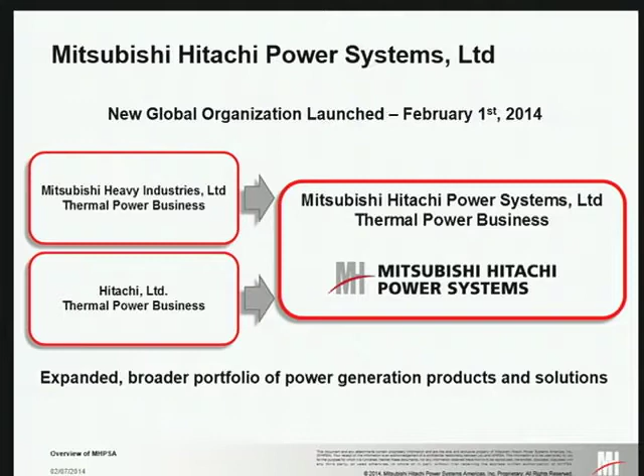As Todd mentioned, we're now Mitsubishi Hitachi Power Systems, so I feel I owe everyone an explanation. If you haven't heard already, as of February 1st, MHI and Hitachi Limited merged their thermal power businesses globally. The new company name is Mitsubishi Hitachi Power Systems, and we're part of the Americas arm of that business.

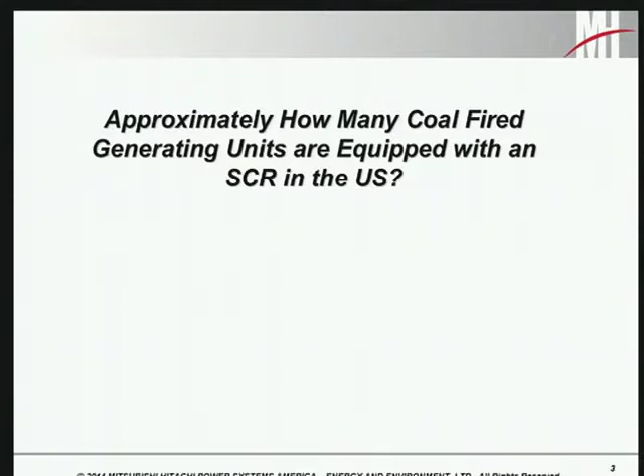So just real quick, anybody have any idea how many coal-fired units are in the U.S. that have SCRs? Any idea? It's actually much lower than that on a percentage basis. There's probably somewhere over 1,000 units out there. Only 300 have SCRs currently.

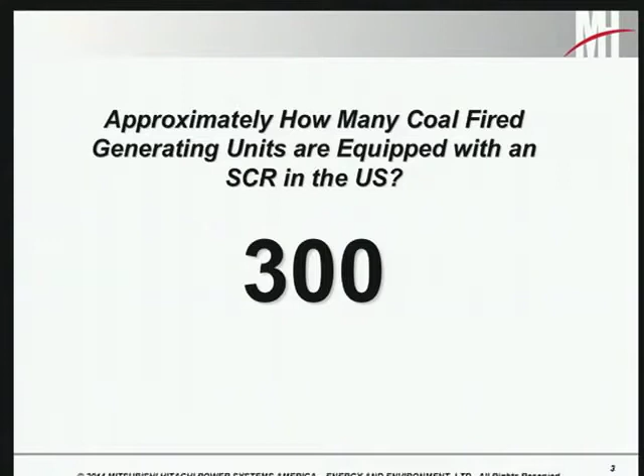But whenever we look at those 300 units, the majority of those also have FGDs in place already. So whenever you look at the oxidation of mercury that takes place across the SCR, most of those units are also able to capture that oxidized mercury in the downstream scrubber. So a lot of units out there are already getting great mercury co-benefits, we call it, from the SCR and FGD. So I'm just going to focus a little bit on how we can optimize that process that's already naturally occurring in our plants.

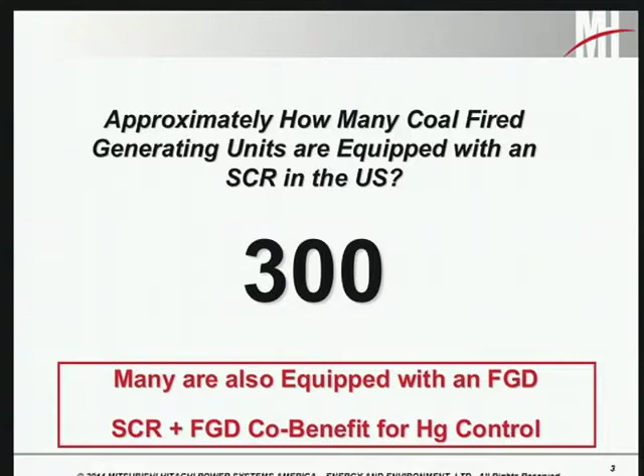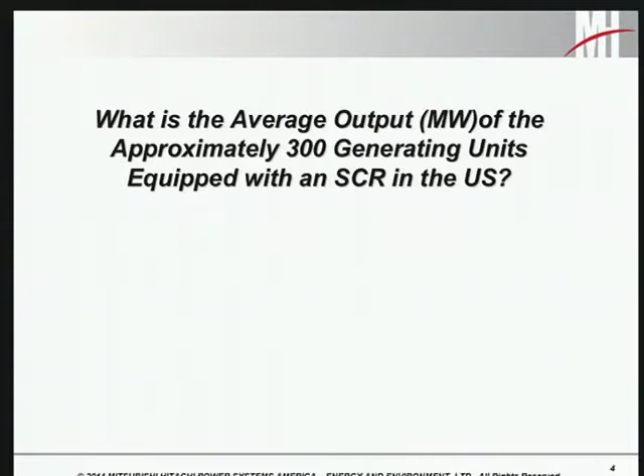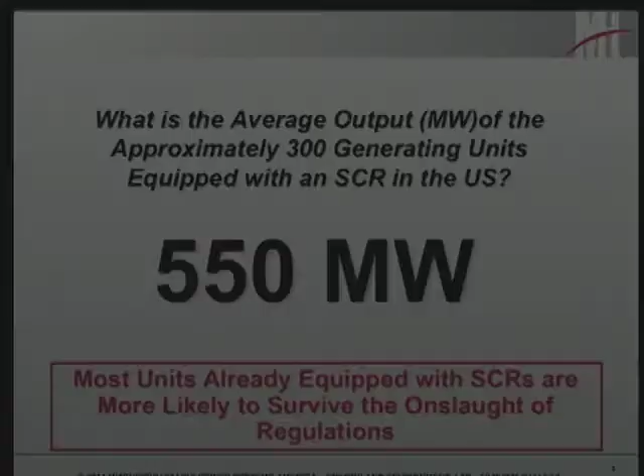So another quick question: of those 300 units equipped with SCRs, what do you think the average size of those units are? Well, it's about 550 megawatts, the average size of those units. So these are the larger units. They're already equipped with SCRs. Most of them have FGDs. They're probably the future of our coal-fired generation base in the U.S. So it makes a lot of sense to optimize and try to keep costs low on these units and comply with the rules.

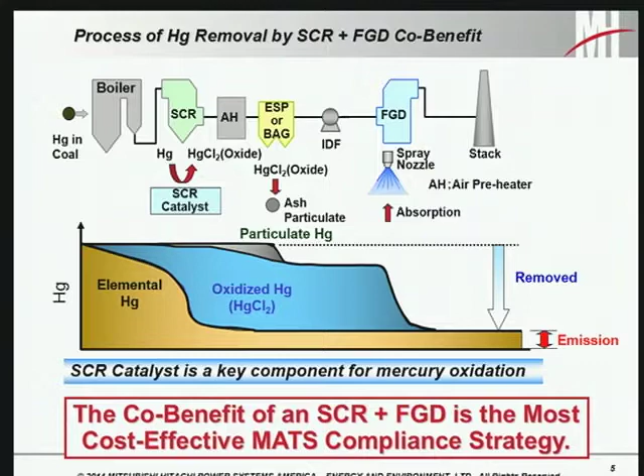Oops, I'm bouncing ahead a little bit. All right, so if we just look at the mercury removal process as we go across a typical coal-fired power plant, you can see the mercury comes into the plant in the coal in the elemental form. You get some mercury oxidation that takes place throughout the combustion process, but the majority of the oxidation actually takes place as the flue gas passes across the catalyst. Oxidized mercury is much easier, much cheaper to take out, especially if your unit also has an FGD. In theory, you can get nearly 100% of the oxidized mercury removed in an FGD as long as you've got good chemistry and you're avoiding re-emission basically. So what are you left with at the stack? Well, you're left with basically anything you weren't able to oxidize. And that's why oxidation in the SCR is such an important factor.

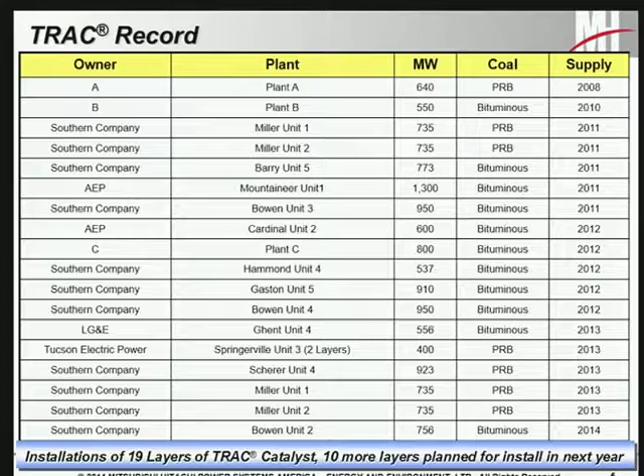So what are some of the main parameters that impact mercury oxidation in the SCR? There are 5 main ones that I'm going to talk about.

That being ammonia to NOx ratio. That's key. As you have more ammonia, typically it's harder to oxidize mercury. They go after the same active sites on the catalyst, and the catalyst was originally designed for NOx. That's the dominating reaction that wants to occur. The catalyst, as it ages and deactivates, it's no different than NOx. The mercury oxidation rate also deactivates and ages as the catalyst has been exposed to flue gas over time.

Halogen concentration is a big one. You've got to have halogens. It's the equivalent of your ammonia in the NOx reduction reaction. You use the halogens that are present in the fuel or added in the combustion process or downstream of that somewhere, but those are what are used with the catalyst to combine with the mercury to oxidize it.

Temperature is another big one in the SCR. In general, the higher the temperature, the less mercury oxidation you're going to be able to get. Lower temperatures are definitely much more prone to oxidizing mercury.

Another big thing we're starting to learn more about—we're constantly learning about what impacts mercury oxidation in the SCR—is what is your elemental to total mercury ratio in the SCR? This has a huge impact. That last little bit of elemental mercury is much harder to get than whenever you have a very high ratio of elemental mercury.

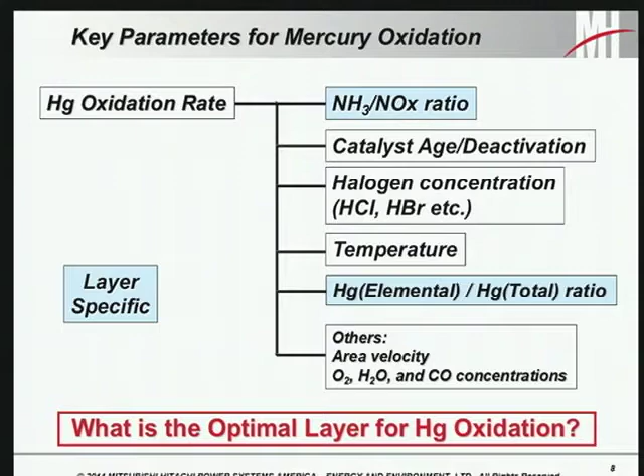So the two that are shaded in blue there are the layer-specific parameters. As you go through your SCR, your ammonia to NOx ratio is going to change with every layer of catalyst, and you're going to oxidize some mercury with every layer of catalyst. So now your ratio of elemental to total mercury is going to be different for every layer of catalyst. Those are the two that I'm going to focus mostly on when we look at trying to build this strategy and what is the best location for getting mercury oxidation in your SCR.

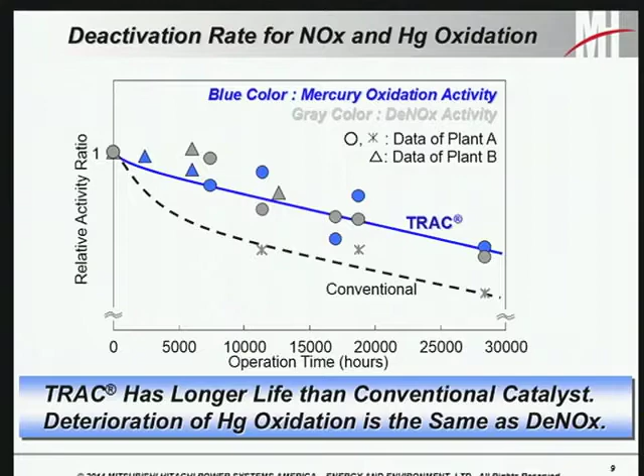So just real quick, I'll hit on the deactivation rate. In general, the deactivation rate of the mercury activity of catalyst is very much in line with the deactivation rate of the NOx reduction activity. So whenever you look at those two things, you can probably still work on a similar catalyst management plan as what you were using in the past.

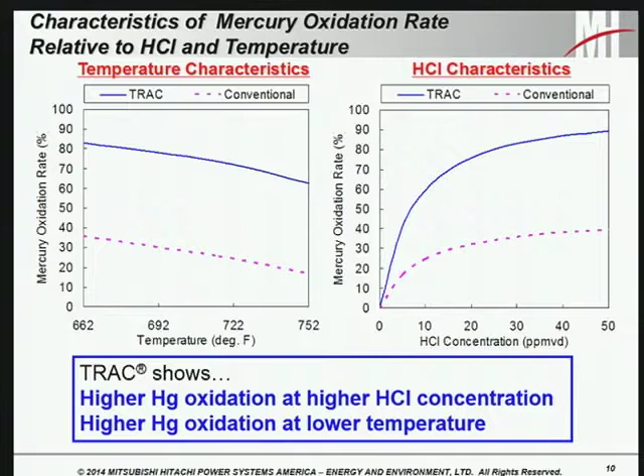Before I get into the layer specifics, I want to discuss a little bit of the testing background and how some of these layer specifics were determined. We do mercury oxidation testing in a lab, small scale—similar to a bench scale test that is very commonly used on catalyst. But we're using a lab scale because we don't want to inject mercury in the bench. It causes all kinds of different problems that, quite honestly, I don't think anyone is doing yet. I know people are looking at it, but no one is doing it yet. So everyone that's testing in the lab with mercury right now is doing it on this small scale lab testing.

So what we do is we're testing in the lab. We're implementing a set of correction procedures and correction curves to try and predict what the performance is in the plant based on that. And over the years and over our testing and experience comparing field results to lab results, we've been able to dial in on this fairly well.

But there's always still things you're learning. There's things such as ash that are present in the field that you really can't account for, and what impact does that have? It's very difficult to determine. So we're learning and getting better every time we do a test, but we're still not 100% accurate in being able to predict the performance in the field with a lab test.

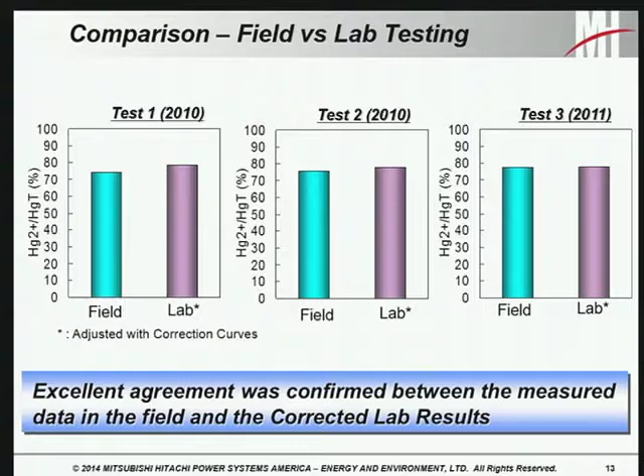We did test 1 and test 2 back in 2010, very good correlation, and then test 3, we came back to the same plant, same location, did the test again in 2011 and got very good correlation again, as you can see. So I think we're very close to getting accurate results based on field and lab measurements, but I just can't say with 100% certainty that every plant is operating the same. There's always differences in every plant.

So if we look at layer-specific impacts, we look at two different scenarios, eastern bituminous case and PRB case. That's what they're calling them. Really, anytime from here on in the rest of the presentation, whenever I say eastern bituminous, you can replace that with a higher or moderately halogenated fuel, or whenever I say PRB, I'm talking a lower halogen fuel.

So for this, as I mentioned before, the ammonia has a big impact, so we looked at 90% NOx reduction, so you've got a large amount of ammonia. In an eastern bituminous plant, general rule of thumb, about 20% of mercury is already oxidized entering the SCR. On the PRB, or lower halogen fuel side, about 10%. And then HCl is the big one. We used what we feel is a typical halogen level for eastern bituminous or a medium to higher halogen fuel, and then the lower halogen fuel, PRB style, 5 ppm.

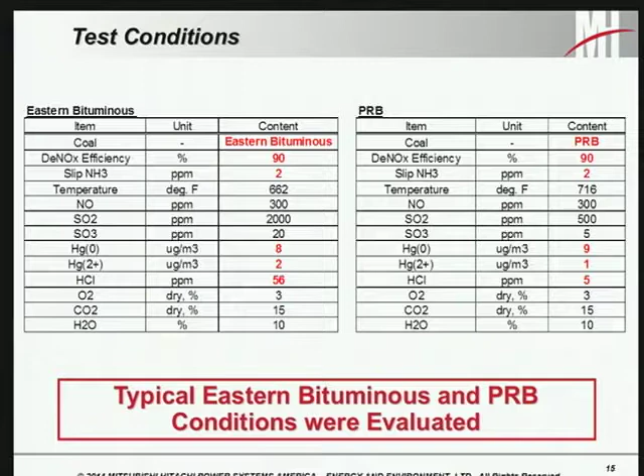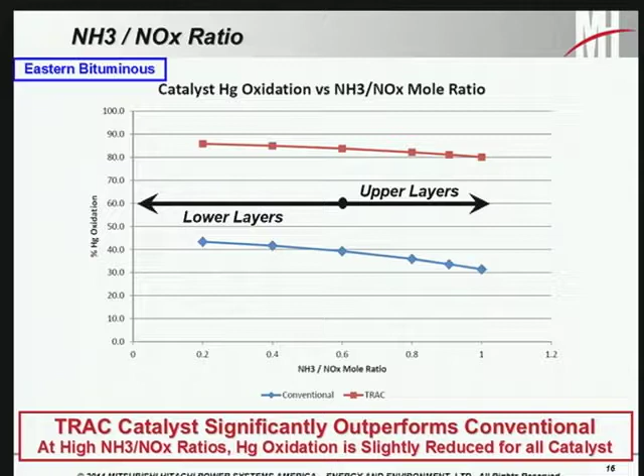But what happens whenever we introduce on top of this and we intermingle the concept of the ratio of elemental to total mercury in the SCR? This next slide takes a look at that. I think I've got maybe in general where your upper layers and lower layers in your SCR relative on this graph, and what the impact is.

But you get more benefit in the lower layers relative to a conventional layer. So where's the balancing act?

So what we did was we looked at 6 different cases. We looked at a base case where you use 4 layers, all conventional catalyst. Then we looked at 4 more cases where you put a layer of advanced catalyst in either the first, second, third, or fourth layer. And then a sixth scenario where you used advanced catalyst in all layers.

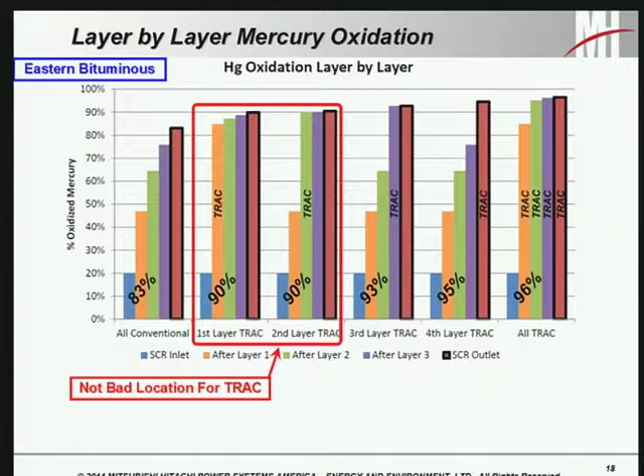So does it even make sense on a higher halogen fuel to go to advanced catalyst in all layers? Maybe not, probably not really. So if you're running your catalyst management plan and you're due to replace your first or second layer, it's not a bad location for TRAC, it's just there are other options out there that are better. So the 3rd or 4th layer is a more ideal location for the TRAC.

This is all based on lab testing. There's errors in the measurements and everything, so who's to say there's a big difference between 93 and 95% in this? It's tough to say, right? So I think 3rd or 4th layer are both really good locations to put in advanced catalyst.

As I said before, if you look at the bottom layer, there's really not much benefit to putting it in all 4 layers. So what impact does this have on actual mercury emissions at the stack? If you look at 83% mercury oxidation compared to 95% in your SCR, and you're assuming a good capture efficiency in the FGD, you're actually looking at a 70% reduction in stack mercury emissions at this plant. So it doesn't seem like a lot when you're looking at percentages, but when you look at what actually makes it to the stack, it's a huge impact.

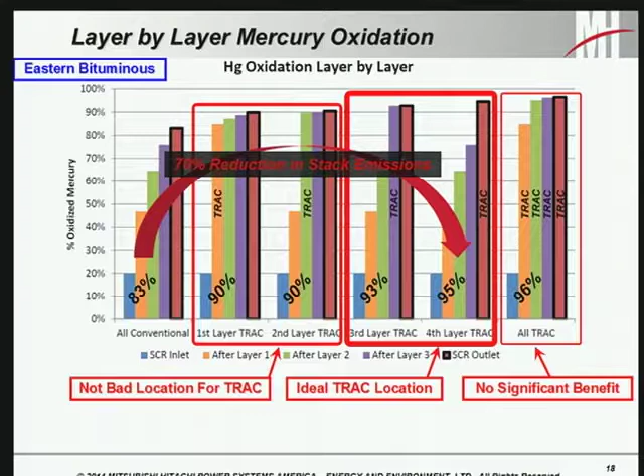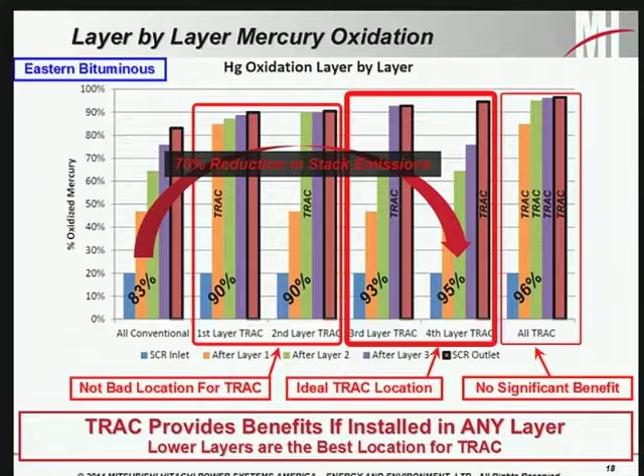So what can we take away from this on the higher halogen fuel side? Really, an advanced catalyst installed anywhere is going to give you some benefit, but if you have your choice, it's probably better to install it in the lower layers.

So same thing for the lower halogen fuel. I'll run through this a little quicker. It's the same analysis, only the halogen concentration is much lower. Again, a very similar relationship on the ammonia to NOx molar ratio. Upper layers, again, a little bit less compared to lower layers, until we factor in the impact of the mercury speciation.

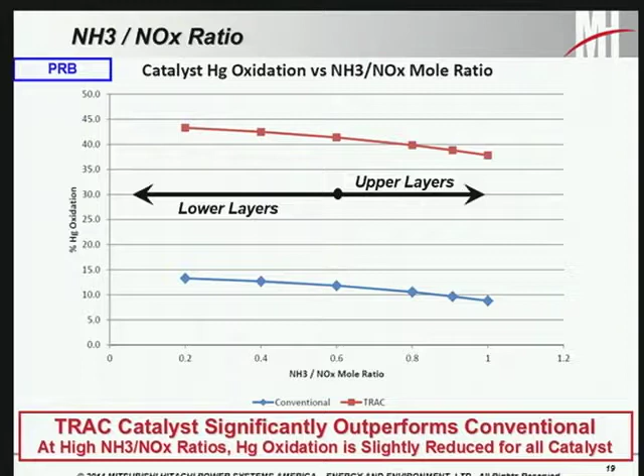There we go. So again, now the curve looks completely different after we implement the concept of different molar ratios of elemental to total mercury. Again, we look at our upper layers compared to our lower layers and the differences between the advanced catalyst. We're getting about 3 to 4 times more mercury oxidation activity in the upper layers and maybe 5 to 8 times more in the lower layers.

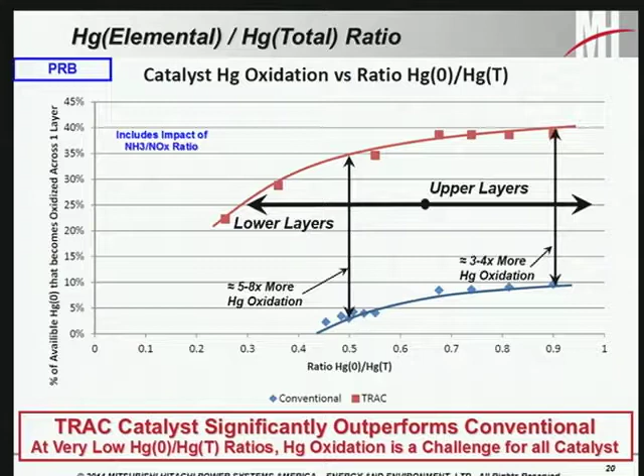So again, what does that mean? Well, we're looking at roughly 38% mercury oxidation with 4 layers of conventional catalyst, boosting it up to 51% when TRAC is in the first layer. When TRAC is in the second layer, it's boosted up to 53%, 56% in the third layer, and 59% in the fourth layer.

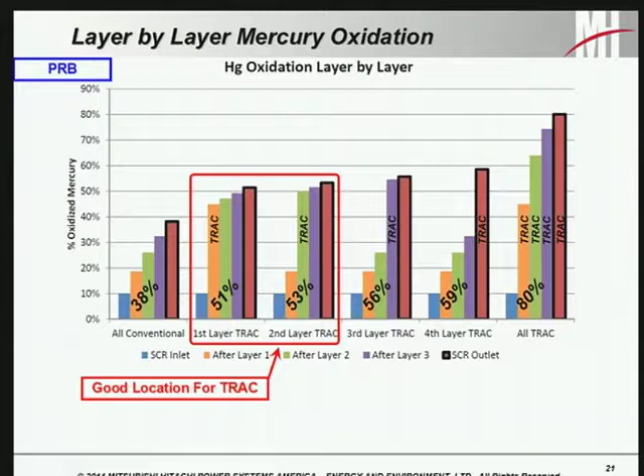But if you look here, you can go, if you get to all TRAC eventually, right? No one's probably going to go out and say, I just want to take all my current catalyst out and put in TRAC. But over the years, as you're replacing catalyst, maybe every couple years, eventually you could get to a point where you might have all TRAC. And we look at roughly 80% mercury oxidation at that point. So what can we say? We can say actually going from 38 to 51%, that's a pretty good location for TRAC, that's not too bad at all. In the lower layers, it's even a better location.

But what's the ideal scenario here? The ideal scenario is installing TRAC eventually to a point where you get as much of it in the box as you can, because you're going to get a noticeable benefit every time you put another layer in.

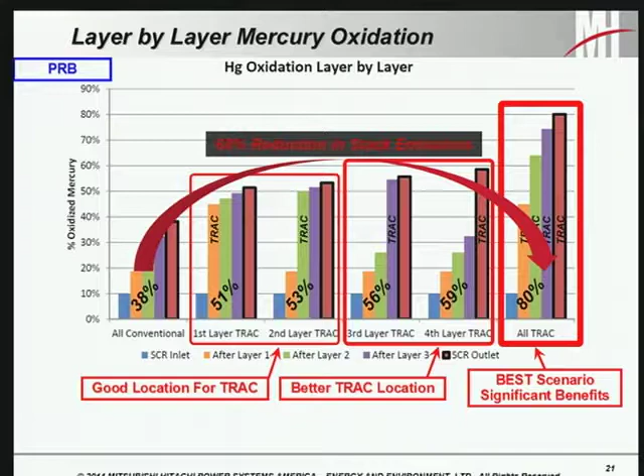So if we look at this again, what it means at the stack, if we went from 38% mercury oxidation in our SCR to 80% mercury oxidation in our SCR, we're looking at roughly a 68% reduction in the stack mercury emissions.

So, in conclusion, what do we say for PRB? We can say really any layer is a good layer to install TRAC, and the more TRAC you have installed, the more benefit you're going to see on mercury.

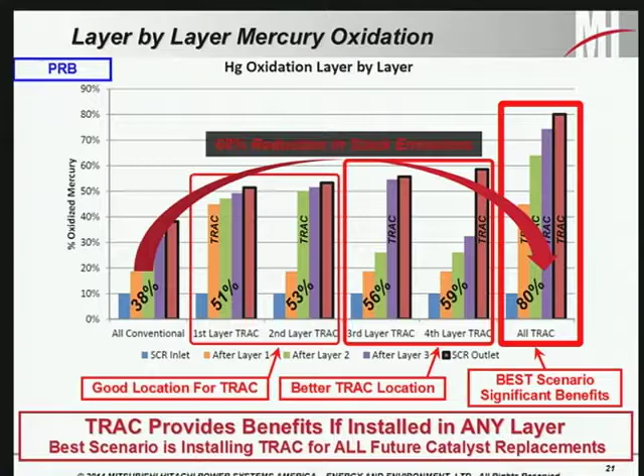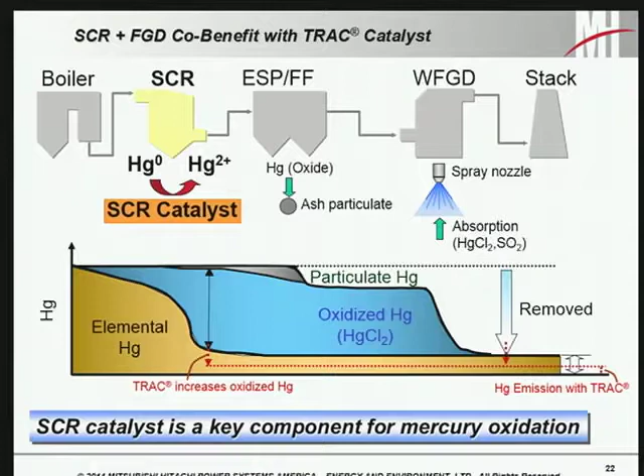This just talks in concept again - boosting your oxidized mercury percentage by a little bit always ends up in reduced emissions at the stack, assuming you're getting good removal efficiency across the FGD.

So a little bit on full-scale results now. We've done a couple tests. We haven't been able to do as much testing or as elaborate testing as we've been able to do in the lab, just because of the cost implications associated with doing the mercury testing on the full-scale side.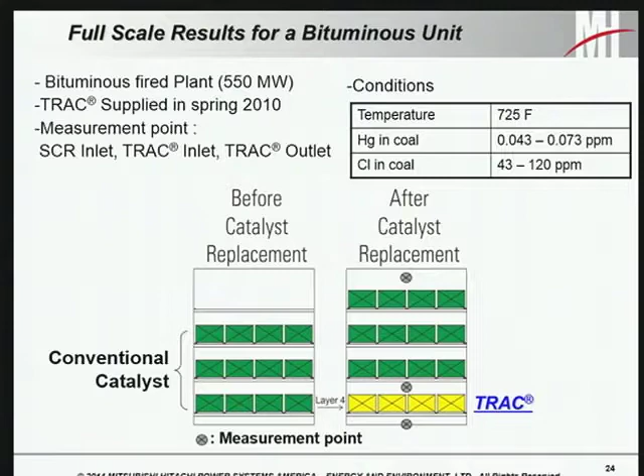And here's the results. We measured at the inlet of the SCR, after the first 3 layers, and then at the outlet of the SCR. At the inlet of the SCR, the average, we're in that 10 to 15% mercury oxidation range. After the first 3 layers, we're in that 40 to 50% range. And then we're up here close to 75% at the end.

So whenever you look at that and what was achieved and oxidized across 1 layer of the TRAC catalyst compared to 3 layers of a conventional catalyst, the actual activity ratio of TRAC was close to 5 times higher than the conventional. And that's in line with what we were able to predict in the lab tests that we did.

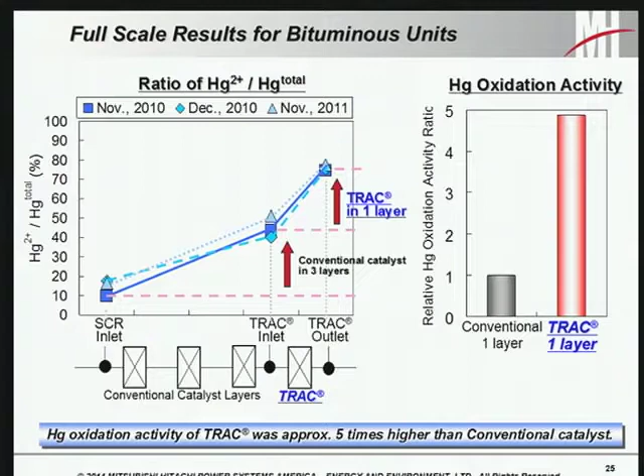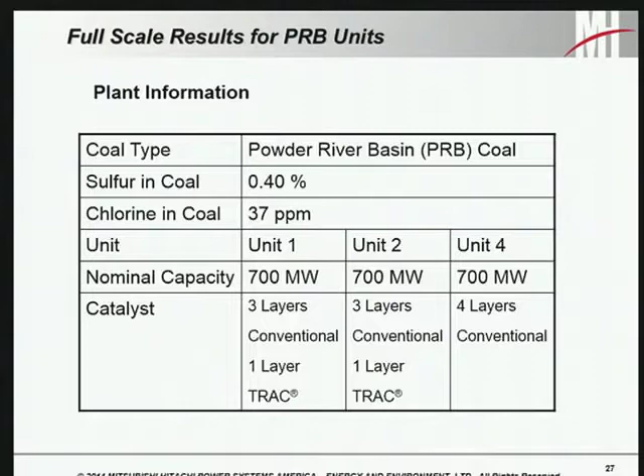Similar, this is now for PRB unit. We actually have 3 units we studied in this. We've got Unit 1 and Unit 2 that have 3 layers of conventional catalyst, 1 layer of TRAC, and Unit 4, which has 4 layers of just conventional catalyst.

Oops, I skipped ahead. So if we look at that, here's the speciated mercury test results. But if you look here, at the SCR inlet on all 3 units, you're less than 5% mercury oxidation. On the 2 units that have TRAC, you're somewhere in that 40 to 50% mercury oxidation at the outlet of the air heater.

And on the unit that didn't have TRAC, you're somewhere in that 10 to 15% range. So again, you can see a significant benefit, about 3 times more mercury oxidation with that last layer being TRAC compared to not having the last layer be conventional catalyst.

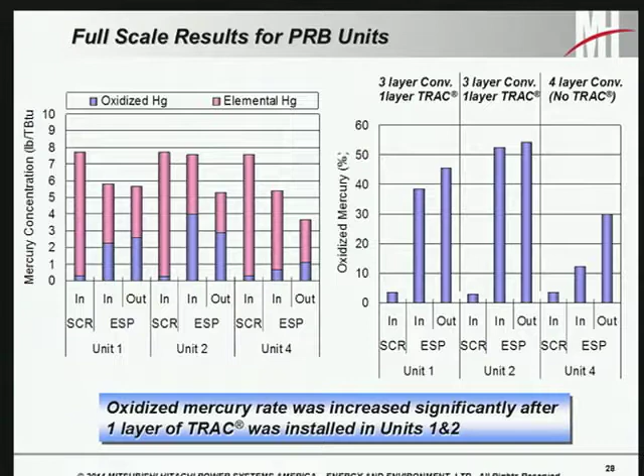So we took this and said, okay, so what does all this mean? It's good, we want to oxidize mercury, but financially and for compliance with MATS, what's the impact? I don't know how I'm doing on time, but I'll run through these numbers fairly quickly here.

We looked at really 4 cases. We looked at our eastern bituminous case with an ESP. We looked at an eastern bituminous case with a fabric filter. We looked at a PRB case with an ESP and a PRB case with a fabric filter. And we compared using catalyst, conventional versus an advanced catalyst in those units to what you needed to do if you were going to trim with activated carbon to get you to compliance with MATS.

Assuming about 95% removal efficiency in the FGD of that oxidized mercury, now they're removing about 83% of the total mercury that was coming into the plant. It gets them close to MATS compliance, but not quite there.

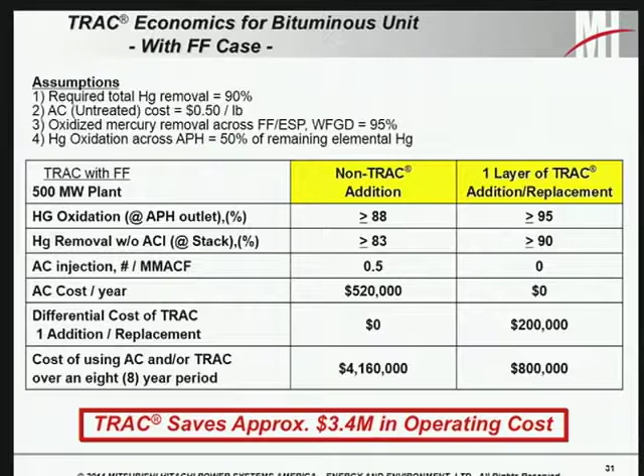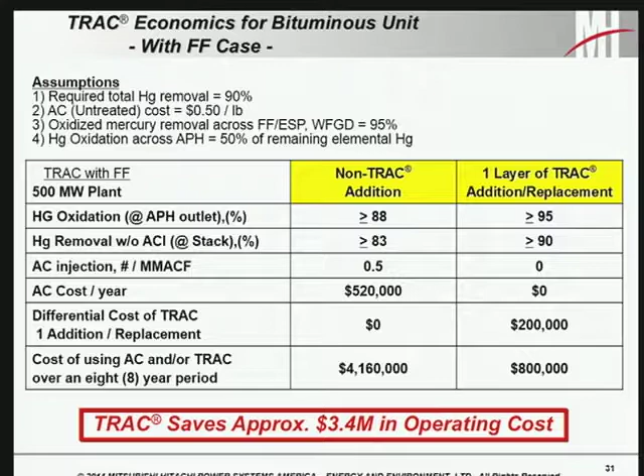We did the same thing with fabric filter. I'm not going to run through it in a lot of detail. The only difference is the activated carbon usage rates are much lower because you get a much better treatment time on the bags. So you can see instead of the 4 pounds, they're roughly at a half a pound per million actual cubic feet. But still over 8 years, roughly $4 million compared to about $1 million. So roughly $3 million in savings on a unit, even with the bag house.

If we look at the PRB case, this is a little bit jumbled just because it looks at the additional benefits as you go from 1 layer for about 2 years, and then you need another layer of catalyst and your mercury oxidation rate increases. But the general story here again is that the less you oxidize in the SCR, the more activated carbon you're going to have to use as trim to get you into MATS compliance.

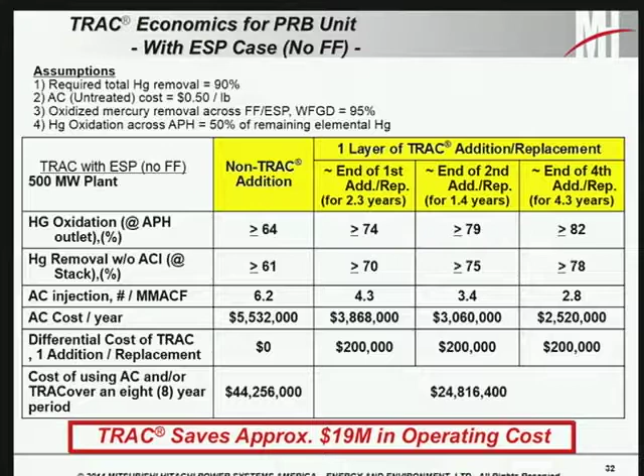So whenever we look at it, best case scenario again is after these 8 years, we use a kind of a weighted average of what they were going to have to use on activated carbon throughout that period as they're transitioning from a conventional catalyst to an advanced mercury catalyst. And we're looking at $44 million in compliance for MATS compared to roughly $24 million, so about a $20 million savings. And same thing with the fabric filter.

Again, the only thing that's changed is the injection rates and the usage efficiency of the activated carbon. And now you're looking at roughly from $6 million to somewhere around $3.5 million. So right in that $2 to $3 million savings range.

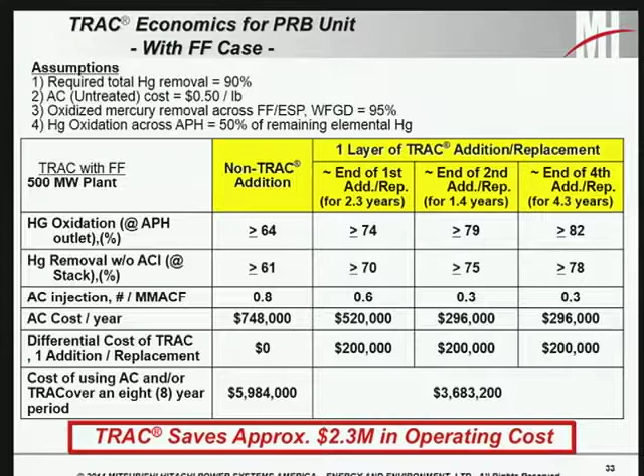So there's a lot to be said about implementing TRAC with your SCR. A lot of people out there, a lot of people sitting in this room already have units with SCRs and FGDs, and optimizing your approach with those existing pieces of equipment without question is going to save money in the cost burden of complying with the MATS rule.